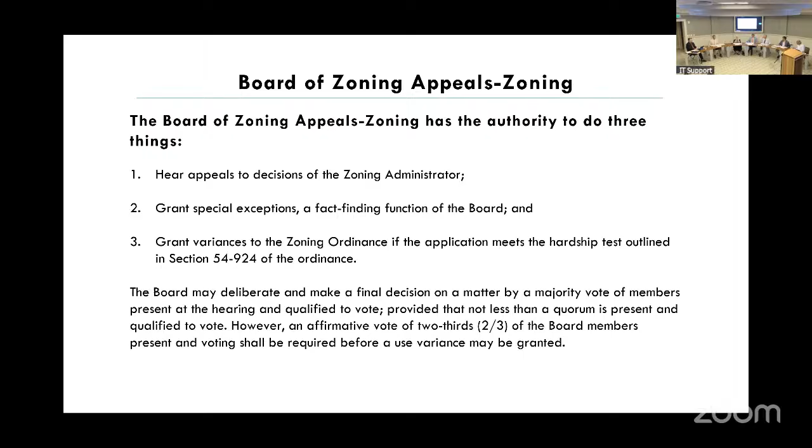The Board of Zoning Appeals has the authority to do three things. Number one, hear appeals to decisions of the zoning administrator. Number two, grant special exceptions, a fact-finding function of the board. And number three, grant variances to the zoning ordinance if the application meets the hardship test outlined in section 54-924 of the ordinance. The board may deliberate and make a final decision on a matter by a majority vote of members present at the hearing and qualified to vote, provided that not less than a quorum is present and qualified. However, an affirmative vote of 2/3 of the board members present and voting shall be required before a use variance may be granted.

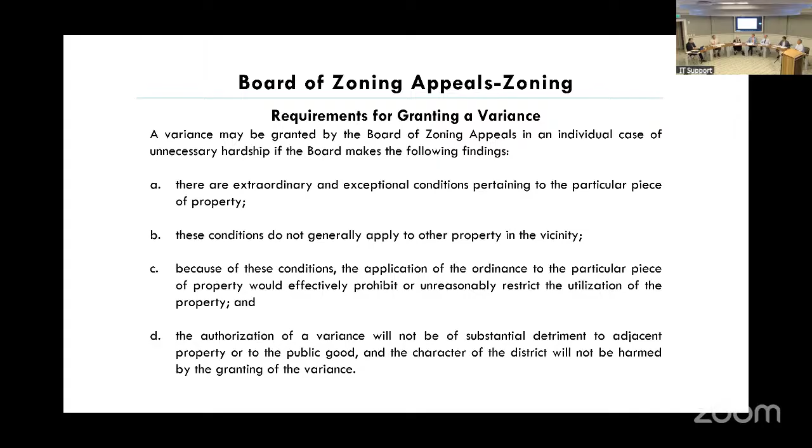I'm required by our city ordinance to swear you in if you intend to speak tonight. So if you do intend to speak, please raise your right hand. If you swear to tell the truth, the whole truth, and nothing but the truth, signify by saying, 'I do.' I do. Thank you.

We don't have any deferrals on the agenda this evening, but Mr. Summerfield has a couple of announcements: one, to introduce a new member of our planning staff, and second, to inform on participation by Zoom by a couple of folks.

Thank you, Mr. Chairman. So just a couple of housekeeping items. First off, I would like to introduce everybody to our new senior planner, Matthew Slagle. He is joining us from the state of South Carolina Department of Environmental Services.

And so we are very happy to have him. He will be serving, for all of those who've worked with Ms. Penny Ashby in the past, in that role, helping to support the Board of Zoning Appeals. We're very thrilled to have him on board, especially since Craig is abandoning us to go spend a year in the Middle East, keeping people safe from missile attacks or something like that. I don't know. Wow. Yeah, he gets to go play war games or something.

Sounds scary though. And then secondly, we do have two participants for item B3, 519 Rutledge, the last item on our agenda this evening. They will be available for the board to ask any questions. They last minute couldn't be here, so we've allowed them to join by Zoom, which is not our normal practice. But we did want to make sure that if the board has any questions for that applicant, when we get to that item, they would be available to respond. So they are on Zoom.

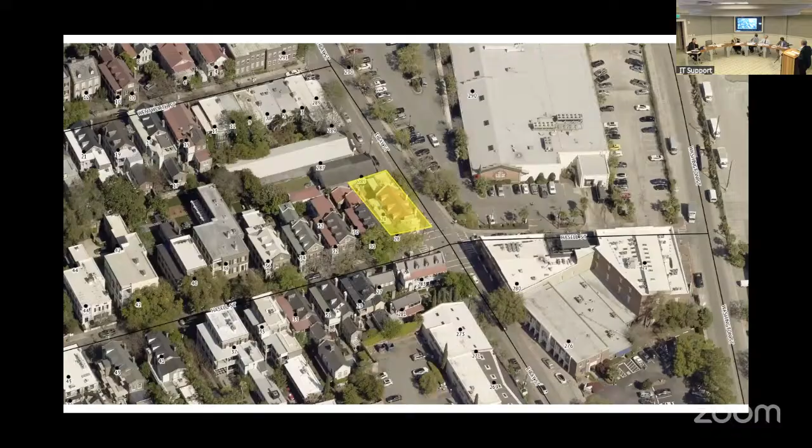Then the next element is whether the special exception will adversely affect neighboring properties. I think this really addresses the comment that the neighborhood association had. We're here for sort of a unique set of circumstances -- this building had been grandfathered for office uses.

It was Charleston Blueprint, and then it was a number of different gallery and interior decorator uses up until 2020, when it became a law firm, still grandfathered for parking. But when COVID came, the law firm ceased operating out of this space.

Which is why I guess we're here. So the question then is, if that's been around for all this time and we're really asking for what's there, basically, pretty much, it should be perfectly fine for Hasell Street.

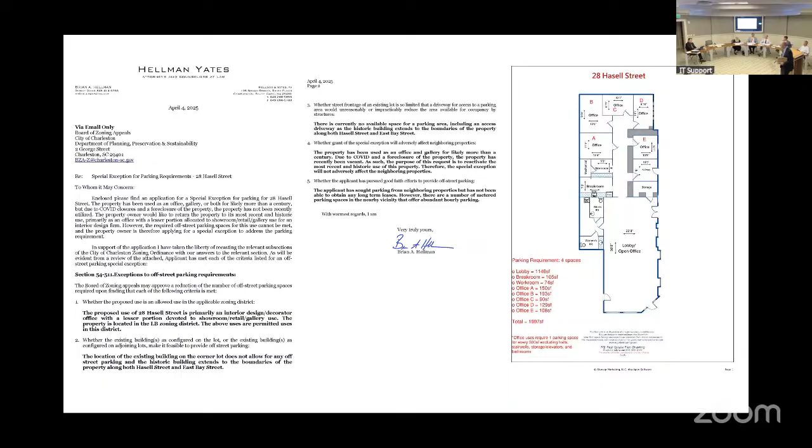Thank you, Mr. Hellman. Anyone else here who wishes to speak in favor or on behalf of the application? If not, we'll hear from opposition. Well, one handed up. Please come on up and state your name and address for the record, please.

Hi, good evening. My name is Jerry Shower, and I live in Anson Borough, and I'm currently president of the Neighborhood Association. We did submit the letter, which you probably all read.

We would update that to 4 parking spaces, if that's what you guys agree is appropriate for their use. They're required to have 4 spaces. If you give them a special exception, there's 0 spaces. They didn't ask for 2 spaces. They asked for 0.

We acknowledge that a 10-year lease on a parking space is challenging. We'll just leave it at that. Our suggestion was acknowledging that to have them have annual leases and just prove that they have parking. Without something in place, it's great that they have parking now, but when that goes away, there's nothing to protect the neighborhood.

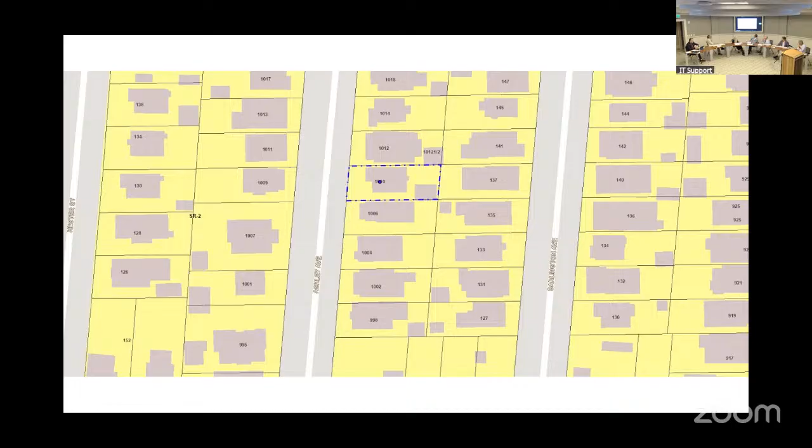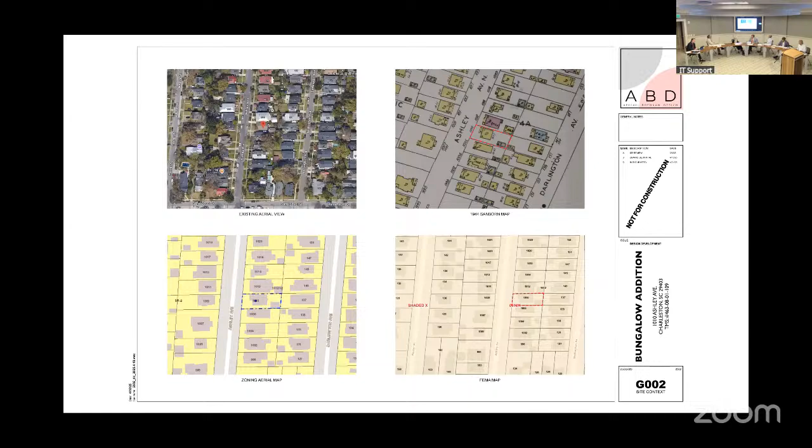The proposed addition would be mapped north here on the property. As you can kind of see from this footprint, this is very close to the lot line, which is why they're making this request. The proposal is on the site plan here. The proposal would be to build out into this area that's highlighted there.

It would be to add a second story to this home. You can see they showed some, in the architecture board world they'd call these precedent photos, showing another area with an existing second story addition.

Again, because of trying to meet the Board of Architectural Review's requirement, which has demolition purview only, they do not get to look at the architecture. They really only get to look at what is being requested to be removed from the existing historic materials. They do tend to request that those additions be pushed towards the back of the property, leaving as much of the existing conditions towards the front as possible.

Again, you can see two precedents. Prior to the board having review authority in this area, the neighboring property was able to actually do a two-story addition that basically eliminated the entire roof line of that original cottage there.

All right, so we have the site plan here. Again, you can see with the color coding, they would be doing the second floor. As part of that second floor, they would continue the existing setback on that north side so that extension would accommodate their remodeled interior, which includes some upgrades to the bedrooms currently located there, adding stairs, and adding essentially a master suite on the new second story of this proposal.

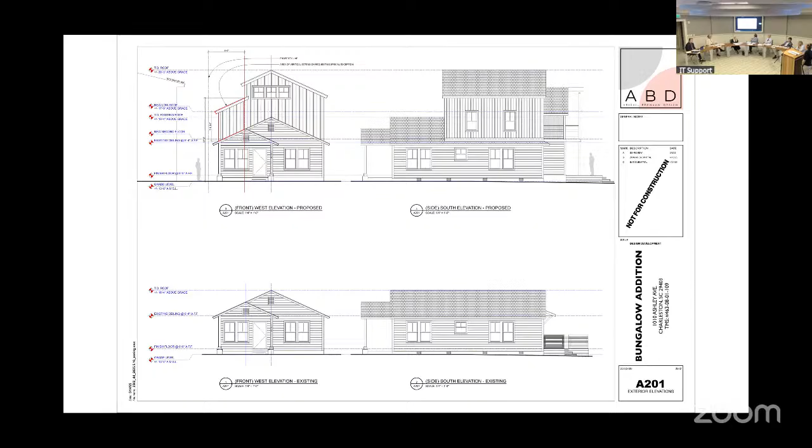We're on a very tight lot. Lot minimums are 6,000 square feet; this one's like 4,700. We don't have room to build in the back, so our only opportunity is to go vertical. Before we go to BAR, we plan to talk with the Preservation Society and Historic Charleston Foundation to get their support and see what we can do. We are keeping the roof eaves, and my client and I both want to keep the integrity of this cute little bungalow, but it just doesn't work for what they're trying to accomplish. It's only a 2-bedroom, 1-bathroom, and it just doesn't function in today's world, I suppose. I think that's it for now. Thank you.

All right, thank you, Ms. Brennan. Do we have anybody else to speak in support of the application? All right, question for the city real quick before we hear from the opposition.

We don't have an action item on the height, do we? No, we don't have any request relative to the height. This is SR2, which allows for... well, this height district, I believe we're within it, I know we looked at it. Unfortunately, Craig was on training for his upcoming med trip, so he didn't help us with this diagnosis, but we looked at the height and I don't believe there was any question about it. So this is just for the height district, simply a vertical extension on just a setback.

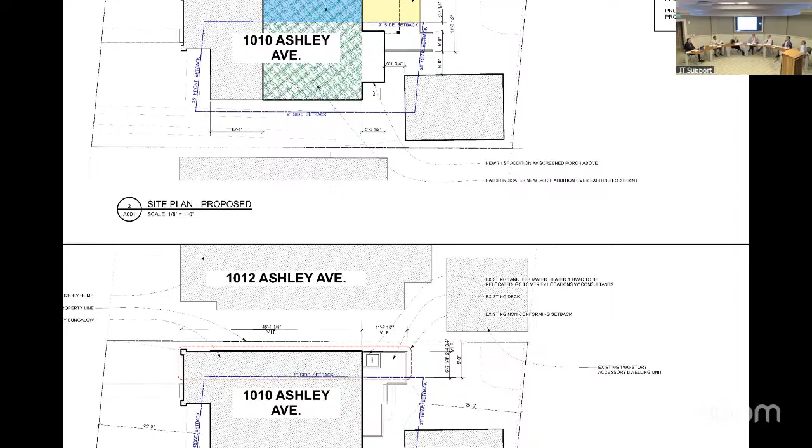The blue is really the area of what you're approving. It's allowing that encroachment into the setback to go up. Well, let's not talk about going up because we're not talking about up, but we're talking about extending the house all the way over to that side. Oh no, you are talking about up, because the house currently goes there. So what you are approving is the fact that their encroachment now will be at height versus just where it's at right now. The house actually travels to that property line.

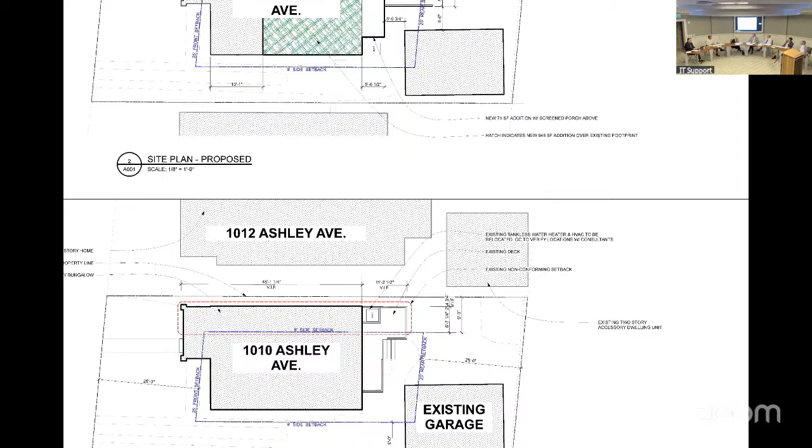Yes, okay, so that part of the house is existing. If I go to the floor plan, you look at the existing - that part of the house remains where it is. Then you look at the proposed - they're reconfiguring the deck back there because they're bumping out this portion for the new laundry mudroom. But when you look at the second floor, this is the crux of the special exception - the area in blue on the plan, that's the vertical extension.

So that area is within the setback, and therefore that's what they have to come to this board for. If they weren't doing that part, they wouldn't come to the board. If they were doing everything else except the blue and the green - since that deck would have a balcony with a roof, that's a thing - but if they were doing all of that, if they had the lot area, it's a smaller lot as was mentioned, they wouldn't be before the board. No, the green area isn't enclosed, it's just a balcony, a roof over the deck with the ability to walk out onto it, it's a second floor element. Okay, but not conditioned space.

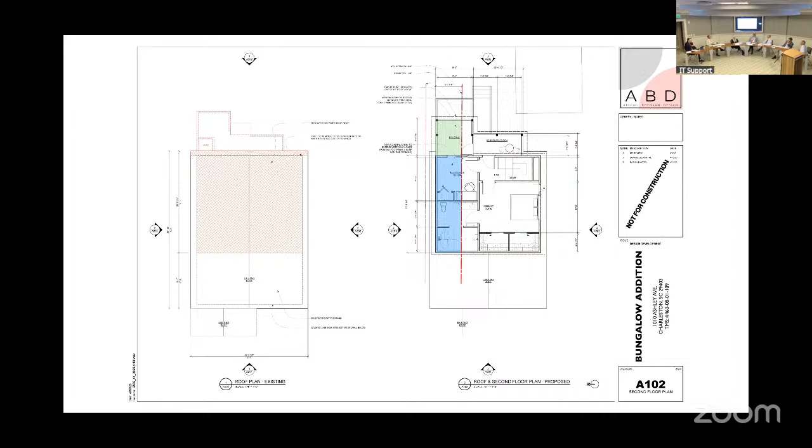As your chair, I will do what I often do in these situations, and that is actually publish the standards. Also known as - Hal knows this - whenever my associate comes in and says, can we do this or that, the acronym is RTFR, which is read the freaking rule.

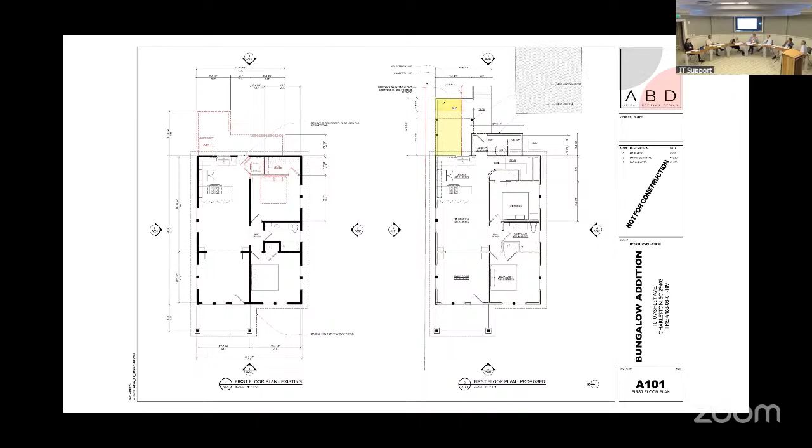The non-conforming use of a building or structure cannot be physically extended to provide more area for the non-conforming use, and the number of bedrooms in a non-conforming two-family or multi-family dwelling use cannot be increased unless the Board of Zoning Appeals, after duly advertised public hearing, finds that the extension or increase of the non-conforming use is, number one, limited to extending or increasing the non-conforming use then in existence. Number two, would not result in an unreasonable intensification of the non-conforming use. That's what we're discussing. In considering the reasonableness of the intensification, the board shall consider the effect of the extension or increase on properties in the vicinity, to include traffic impacts.

Don't think we're worried about that. Vehicular and pedestrian safety, not worried about that. Parking impacts, no. Potential impacts of noise, lighting, fumes, or obstruction of airflow or light to an adjoining property - I don't think we're there because we've got consent.

Impacts on the aesthetic character of the environs, and that was the standard enunciated by the Preservation Society, to include the possible need for screening. If an extension or increase is permitted, the board may impose reasonable and appropriate conditions and safeguards for the protection of the public interest in neighboring properties, including but not limited to limitations on days and hours during which the proposed use will be operated.

That's not for us. And shall require for properties located in the old and historic district that exterior alterations be approved by the Board of Architectural Review, regardless of whether said alterations are visible from a public street or thoroughfare. So we can, if we so choose, require - and maybe we read this as we must - require that the Board of Architectural Review approve any exterior alterations in connection with this special exception.

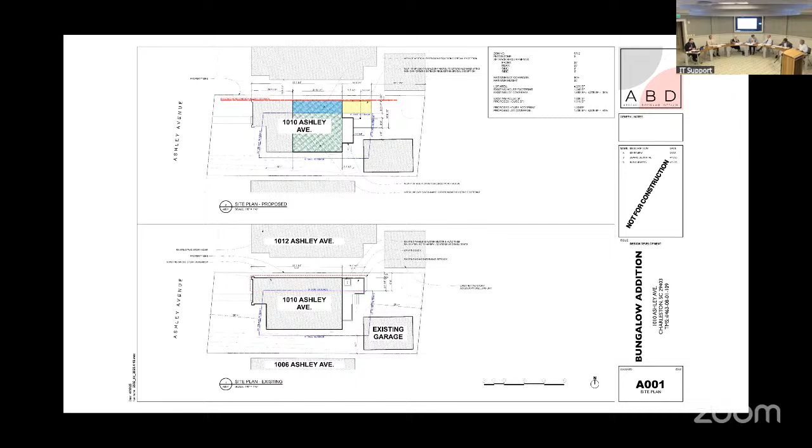The next item on our agenda.

B2, 2 King Street, Charleston, Council District 8, TMS number 457-16-02-060, zone SR3. Requesting a variance from section 54-301 to build a generator stand with a 0-foot north side setback and a 30-foot front setback. 6 feet and 60 feet are required. The owner is Cynthia Corley.

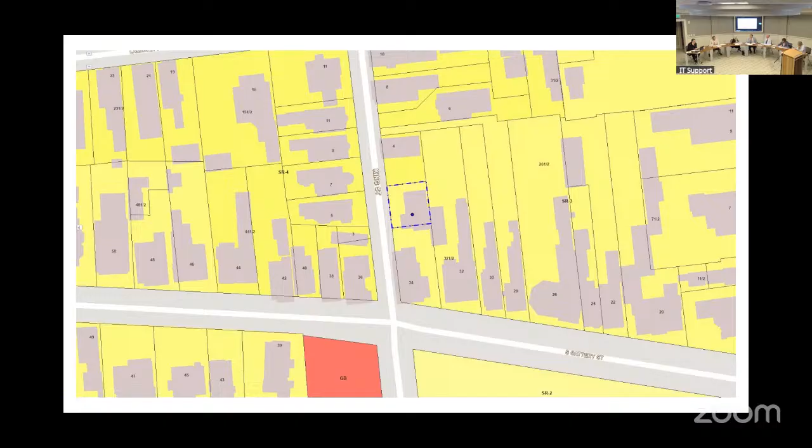The applicant is Alyssa Britton. Mr. Summerfield: Mr. Chairman, members of the board, I'll point out we do have an ordinance going through the council process. It'll be on council for first reading and public hearing next week that will hopefully take some of these requests for variances related to generator stands off the board's plate. However, this one, requesting a generator stand 0 feet from the side setback, would not be eligible for that. So that's why this one is coming before you now. As you can see in the aerial here, it's property on King Street.

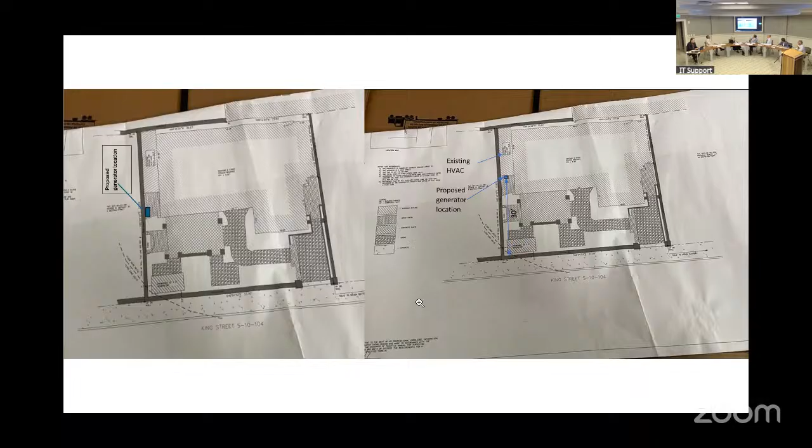The footprint doesn't really do justice to the fact that there is just not a lot of space on this site that you would put that. You can see here on the plans that were provided - unfortunately they weren't great, they're photos of plans - but you can see where the generator stand would be on this property. Again, there's not really anywhere else to put it. It's going to be really close to that property line.

You can see the existing HVAC stand is pretty much in a similar position relative to the north property line. Given this condition, and given that we're encouraging everybody to raise that mechanical equipment to be prepared for an emergency - if it was at grade, it wouldn't even be a question, but because the stand is a structure in the setback, that's why we're here. Staff is recommending approval. All right, thank you, Robert.

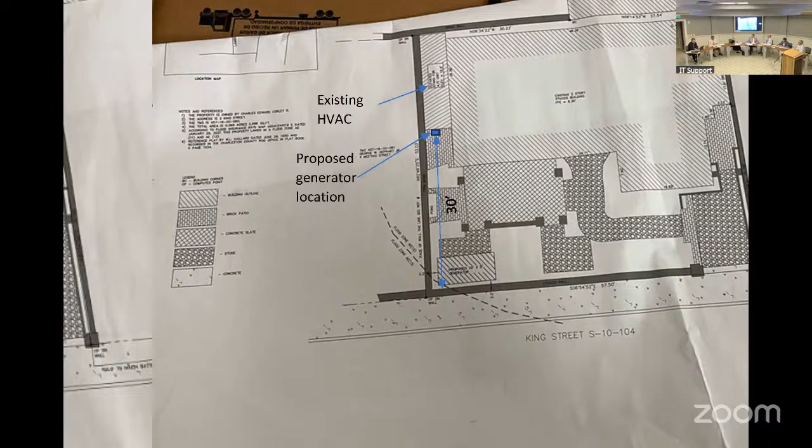Do we have anybody here in opposition to the application for 2 King Street? Seeing no one, do we have the owner applicant here? Anything you'd like to say to the board?

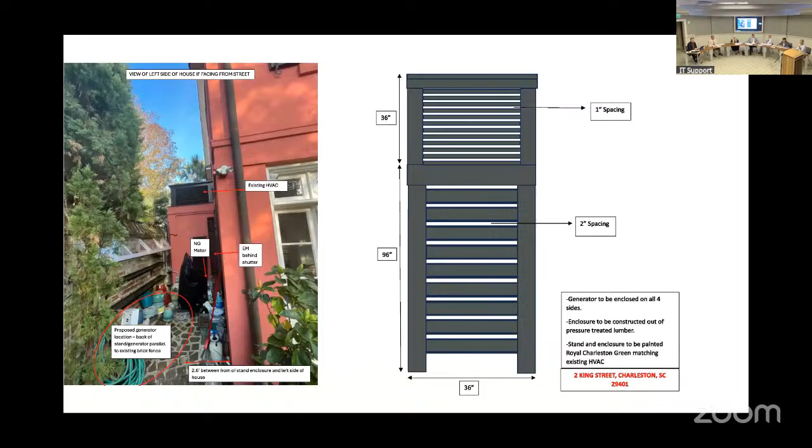Okay, any questions for the city? Motion? I'll make a motion for approval. Moves to approve. Mr. Morrison seconds the motion. All in favor, please say aye. Aye. Any opposed? None are opposed. The motion passes and the variance for 2 King Street is granted.

Thank you very much. And just for the applicant, we can then begin to look at the permit on that after the appeals period is closed.

All right, the final item on our agenda, B3, 519 Rutledge Avenue, West Side, Council District 6, TMS number 460-07-02-219, Zone DR1F, requesting a variance from section 54-301 to allow a new single-family home with a 3-foot 2-inch rear setback and a 2-foot 7-inch north side setback, where 25 feet and 3 feet are required.

The owner applicant is Benjamin W. Randall. Mr. Summerfield: Mr. Chairman, members of the board, you can see the property here off of Rutledge Avenue. It is a property that does have other existing residential buildings on it. There is an existing structure, you can kind of see it here in the aerial, and then in the footprint. This structure would be removed to allow for a new dwelling unit.

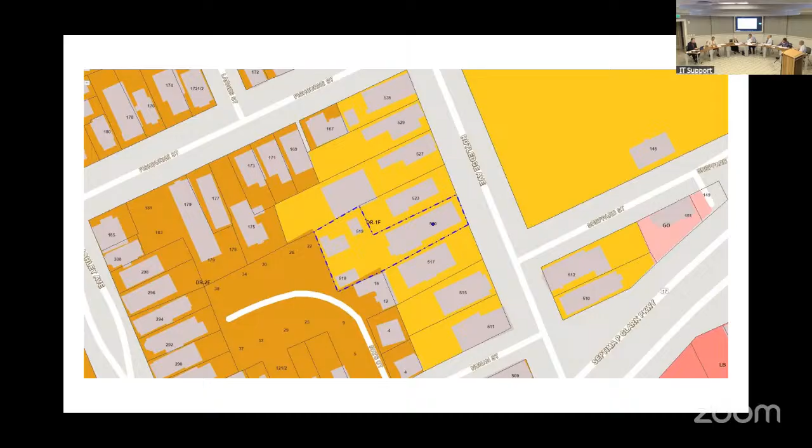This is not an accessory dwelling unit. It is a new single-family home, which is permitted by the DR1F. This will bring this property up to 3 dwelling units, which means that this dwelling unit, as I understand the rules, will require it to go through our technical review committee as part of its review, so it will have some additional review responsibilities it'll have to go through.

But you can see the lot here on the survey that was done. Again, for whatever reason, it's not showing here the existing building that is removed to make way for this house. You can see the main house fronting out on the relatively narrow lot frontage on Rutledge, and there's a small home on the plan here. This would be the area where the new home would be built. There is a footprint here, but this has all been demoed for a new development that will be going in on Nats Court.

So this is a relatively small house; in a different context, you might almost call it a garage apartment. But because it's allowed to be its own unit instead of an accessory dwelling unit, you basically have a structure that, because of the flood district, couldn't do anything at ground level other than the proposed garage with utility storage and so forth. You would enter off of the side, come up to the 2-bedroom second story. Again, it's just a 2-story home.

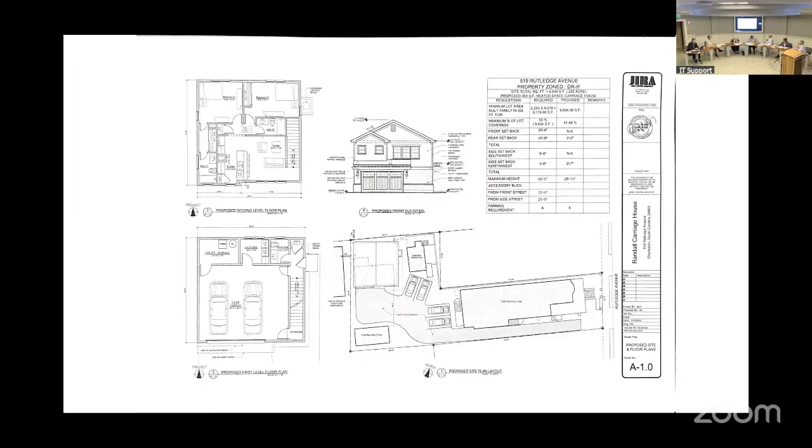All right, thank you, Robert. We don't have anybody in opposition to this application. Do we have the owner or applicant on Zoom? They are on Zoom, yes.

Is there a way to permit them to make a comment if they'd like? Yeah, we can ask them to unmute. Mr. Randall, you should be receiving a request to unmute on your screen. Mr. Rivers, if you would like to unmute.

Good afternoon, board. Anything you would like to add regarding your application? I'm the architect representing Mr. Randall. There's no requirement for you to comment, but if you'd like to say something, that's fine.

Does the board have any questions? Maybe we ought to start with that before we. All right, no questions for the city, no questions for the applicant. Hate to deny the applicant the right to speak, however, not sure they'll be prejudiced. So do I have a motion?

Move approval. Mr. Morrison moves to approve. Is there a second? I'll second, Mr. Huey, you got in there first. All in favor, please say aye. Aye. Any opposed? None are opposed. The motion passes, and the variance for 519 Rutledge Avenue is approved.